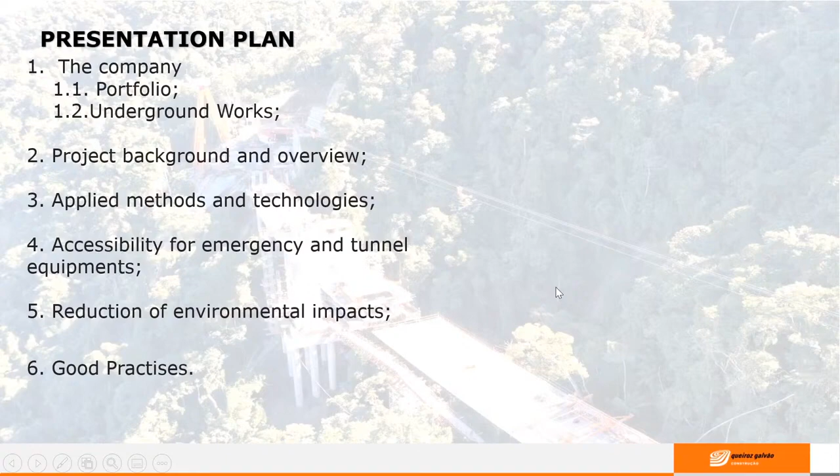So let's start the presentation. Here we have a short presentation plan with some topics that we are going to talk about in sequence: quickly about the company, the project background and overview, applied methods and technologies, accessibility and emergency and tunnel equipment, the reduction of environmental impacts, and the good practices of this contract.

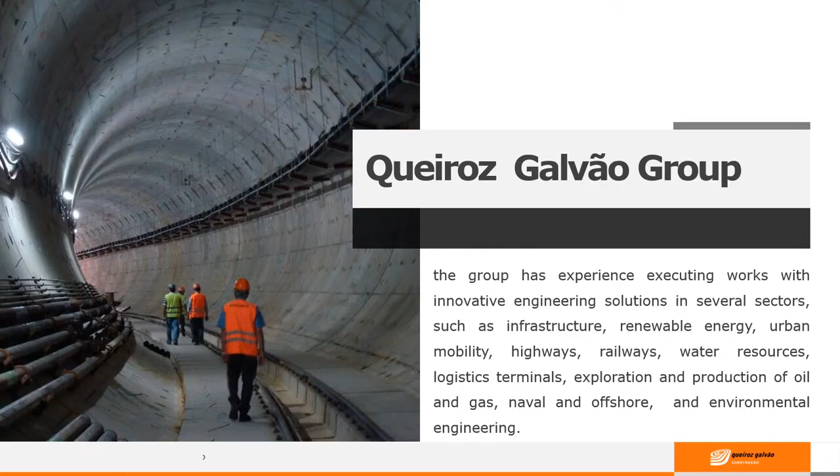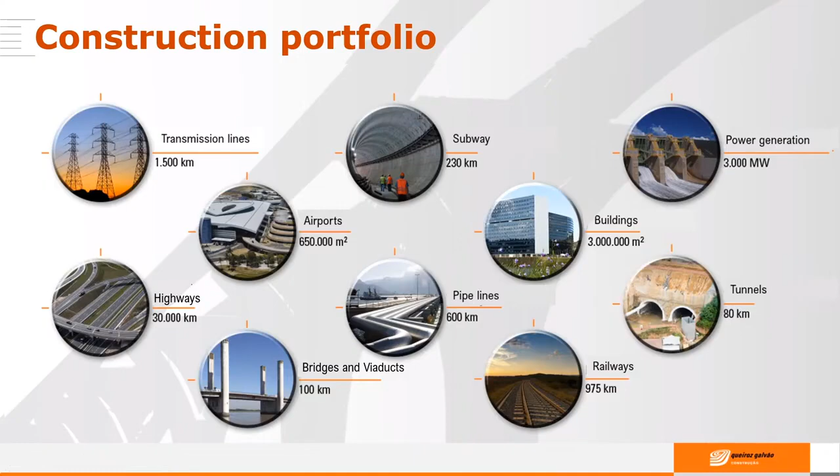So here we have a resume of the group Queiroz Galvão. With more than 67 years of history, the company operates in national and international markets and has experience executing work with innovative engineering solutions in several sectors, such as infrastructure, highways, airports, bridges, pipelines, buildings, railways, subways, power tunnels, power generation, and underground works. In this segment, we have more than 300 kilometers executed.

So, as we're talking about tunnel works, I'm going to show quickly other important projects of the company. This work in Brazil was the Metrofor, in the northeast of Brazil, as you can see on the map. It was a work with the cut and cover method with diaphragm wall.

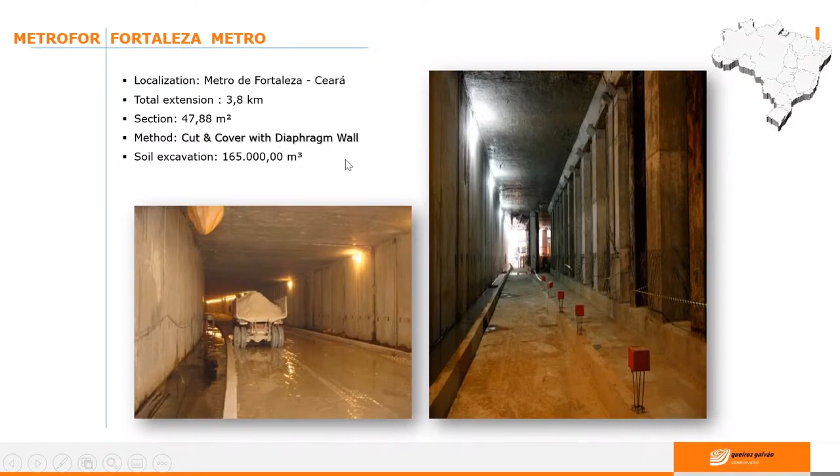Here we have line 5, the metro of São Paulo. The method used was NATM and TBM. In this case, NATM was used to do the shafts and TBM for the tunnels.

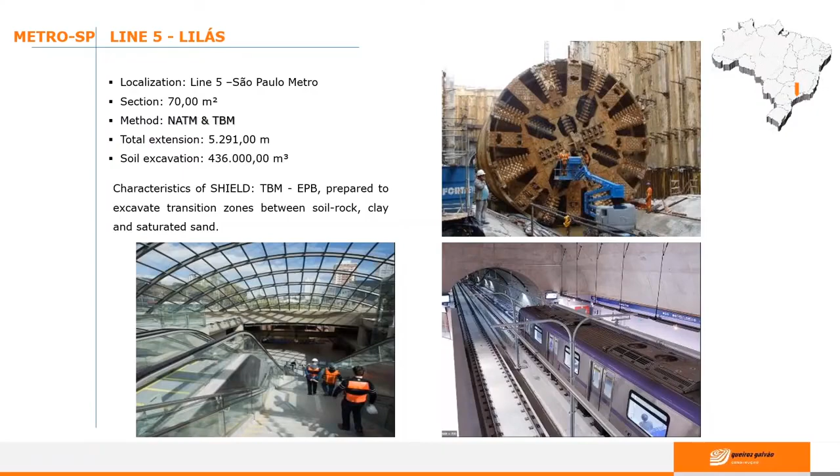Here we have line 4, the yellow line, São Paulo Metro. The method used was NATM and TBM. In this case we have 4.6 kilometers of NATM tunnels and 6.3 kilometers of TBM tunnels.

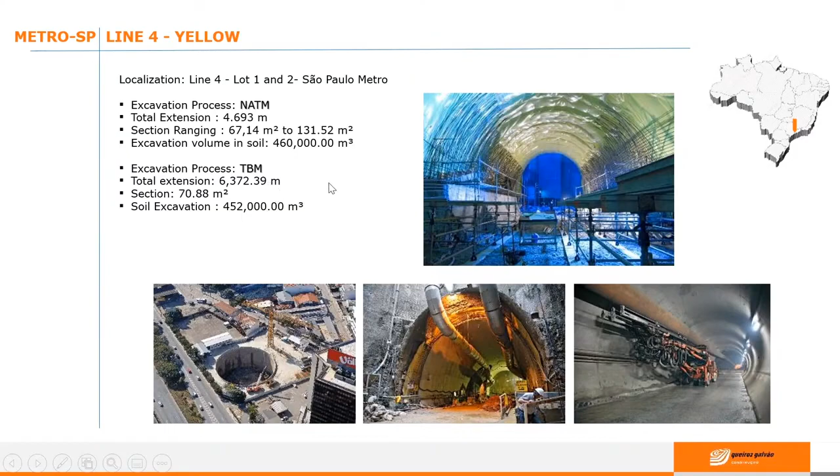Now here we have line 4, but in this case in Rio de Janeiro. This tunnel used both NATM and TBM as well, with a section over 100 square meters.

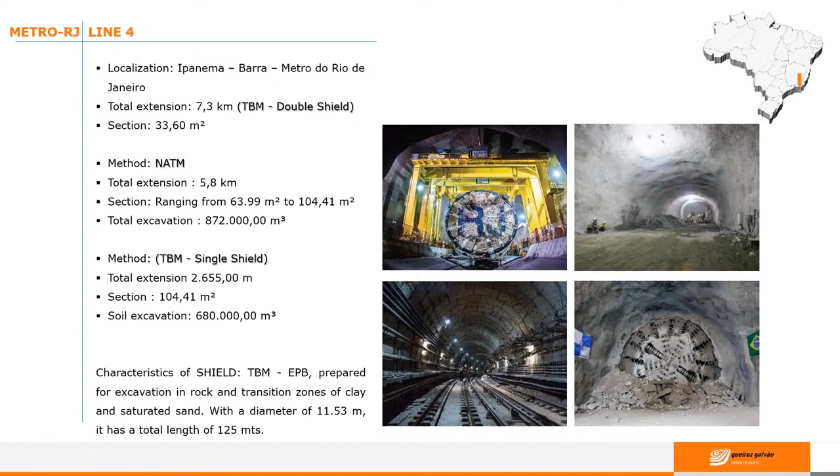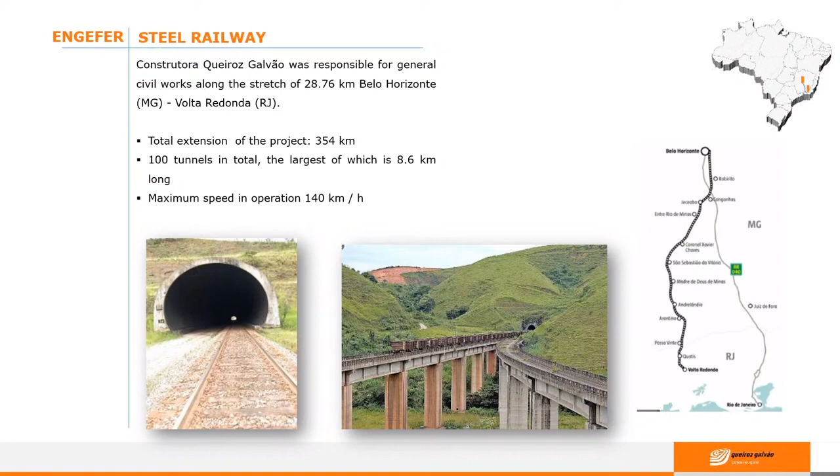Here we have the railroad tunnels. This one was made to create a connection between the countryside of Minas Gerais, a region rich in iron ore, and a region in the state of Rio de Janeiro, a steel industry region. Queiroz Galvão construction was hired to build a lot with almost 28 kilometers. In total, this project had 350 kilometers of extension and almost 100 tunnels in total, the biggest one with 8.6 kilometers.

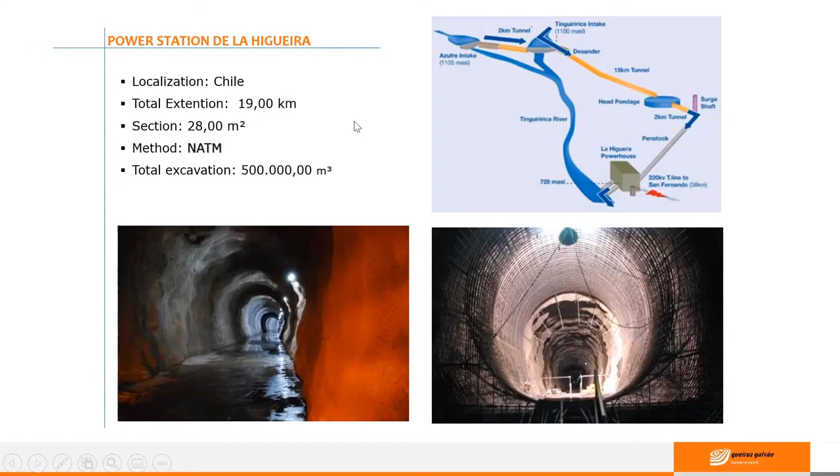Some hydraulic tunnels - here we have a work in Chile. It was a power station in La Higueira, in the city of La Higueira. In total, we have 19 kilometers of NATM tunnels.

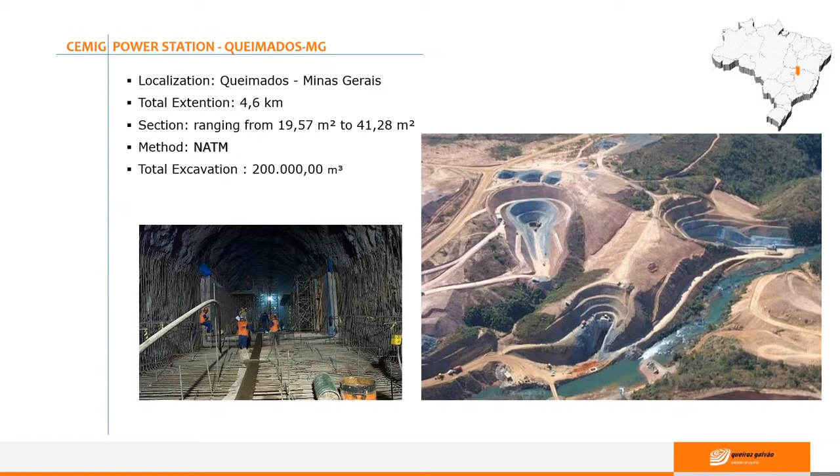Another one, another power station, Queimados, now in Brazil, in the southeast region. We had a total extension of 4.6 kilometers, and the method used was NATM.

Here we have the highway tunnels, an important highway here in Brazil, the BR 101. It was in the south region, as you can see on the map. We used NATM, in soil and rock, and the section was 125 square meters. The total extension was 3.7 kilometers.

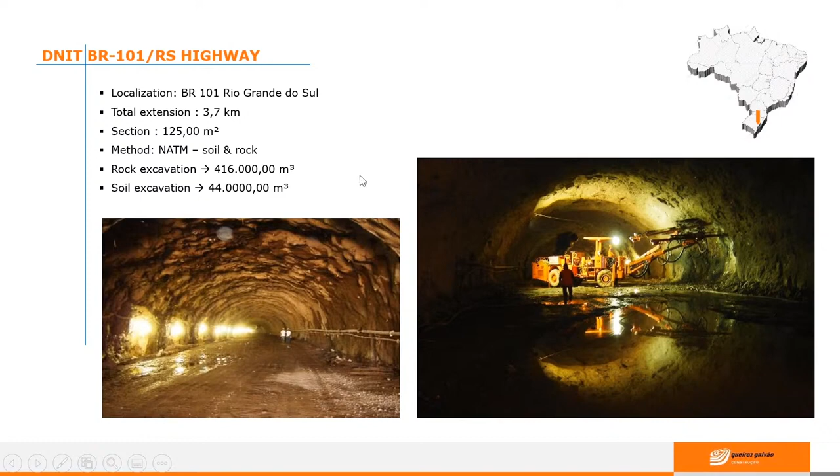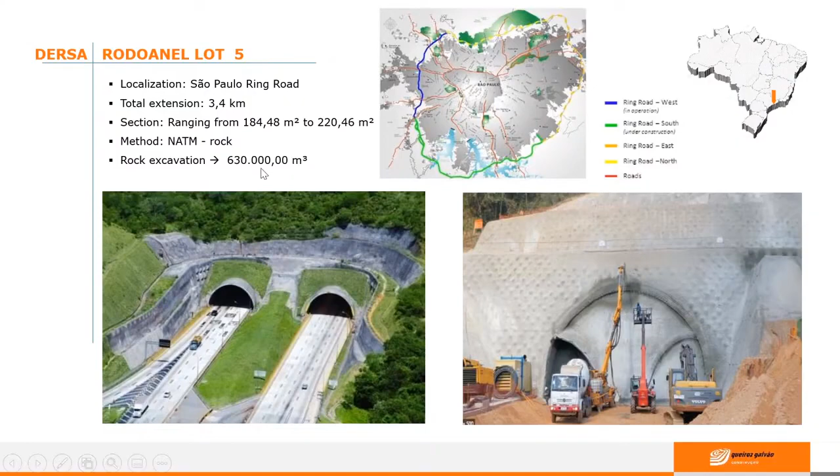We have here the Rodoanel Lot 5. It was a ring road around São Paulo. The total extension was 3.4 kilometers. The method used was NATM for rock excavation, with 630,000 cubic meters of material. Here we have another work in progress.

This one is in Salvador, Bahia, a state of the Northeast region. It is a connection between the littoral, the Atlantic coast, to the center of the capital, Salvador. This work has 3 tunnels and almost 12 kilometers, with 3 lanes each direction.

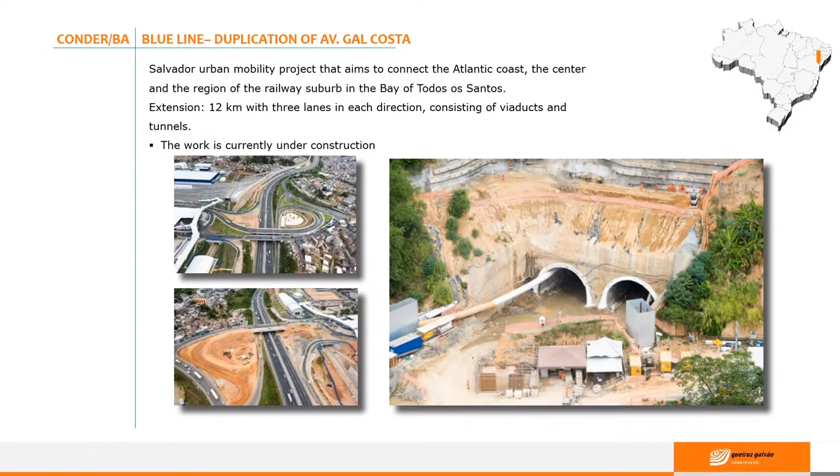Here we have to create a connection with the Tamoios highway and the port. I will explain better later, but this project specifically is going to connect the Tamoios highway when in operation, as illustrated in the next slides I will show.

This work that we finished recently, I had the privilege to participate in from the beginning. It was more than 12 kilometers of tunnels with a section of 105 square meters, and we used the NATM method. It was a double tunnel with a section around 105 square meters.

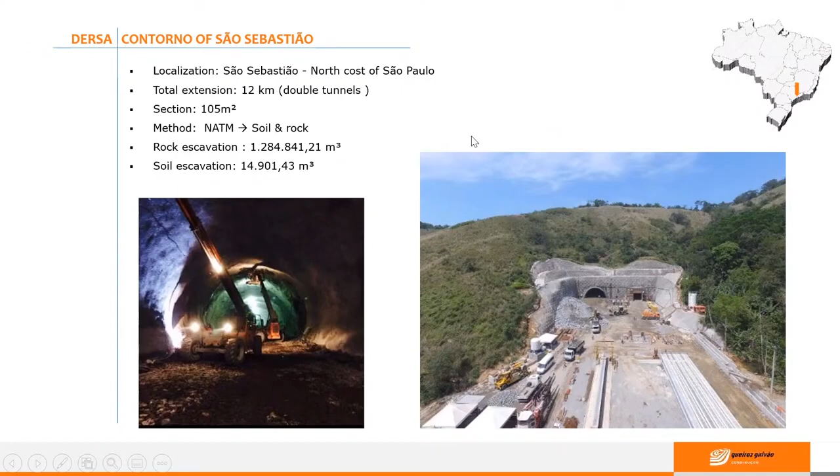So now we've got to the point. Let's discuss the Tamoios Highway. Here's some key information for the project. This work is located on the north coast of São Paulo, in the city of Caraguatatuba. We have almost 13 kilometers of tunnels and 10 viaducts or bridges. The method chosen was NATM. And so let's start.

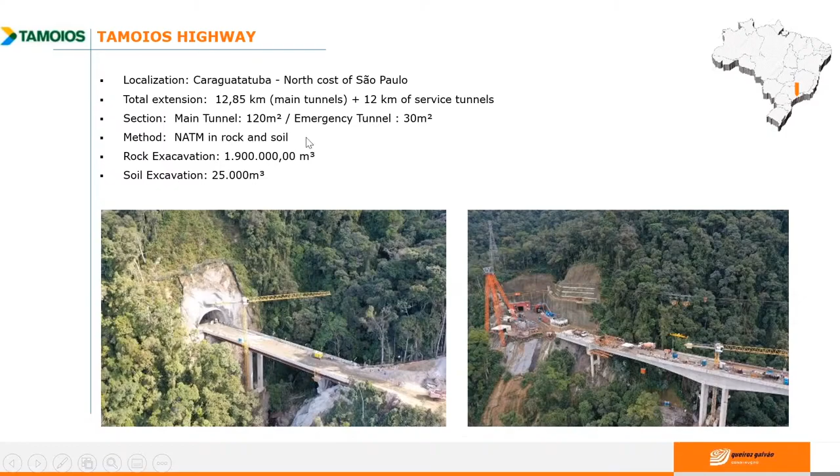The Tamoios Highway crosses the Serra do Mar State Park. The duplication of Tamoios Highway will provide more safety for users, with smoother ramps, less sinuous roads, and more open curves. In addition, it will improve the flow capacity of products to the port of São Sebastião, moving the economy. Due to the differentiated technology solution to reduce impacts on the Atlantic rainforest, the project received in 2017 the Eco Sustainability Award from the American Chamber of Commerce, an international entity.

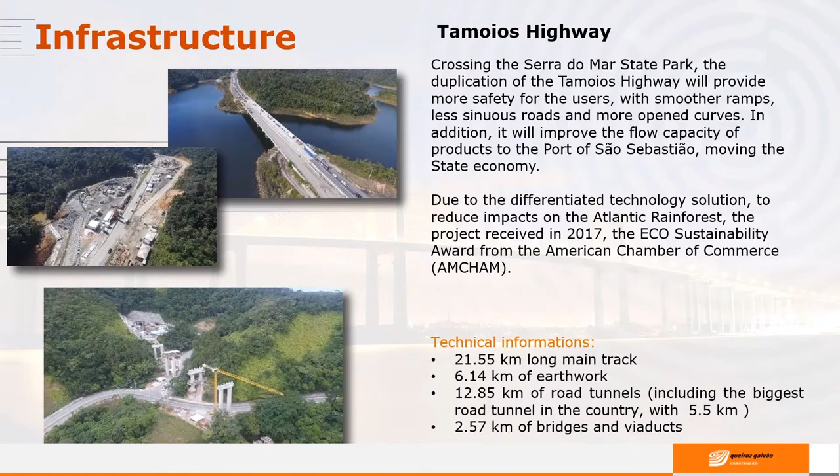It's important to say that almost 85% of this work is inside this park, the Parque Serra do Mar. It is located in an environmentally protected area with several species of animals and plants. So more than 80% of this work is inside a protected area.

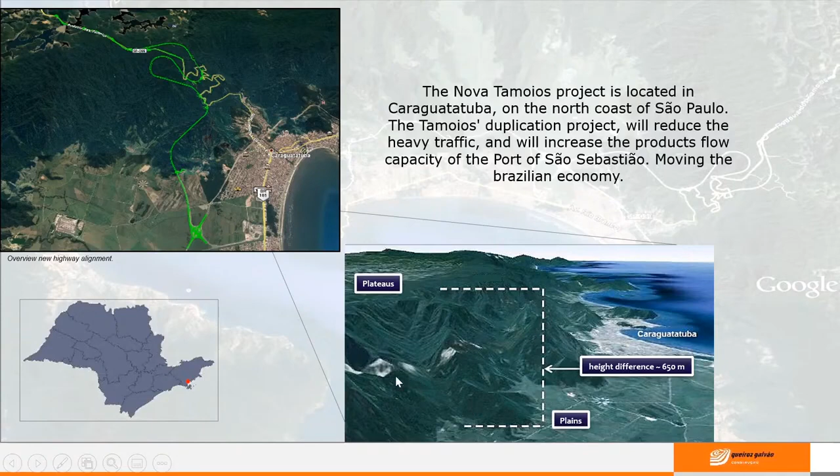Those were the big challenges here: to bring the highway from the top of the mountain to sea level, and also to build the viaducts and tunnels inside a protected area. So I think if we summarize, those are the challenges.

This port, in particular, has better conditions of operation than the port of Santos, one of the main Brazilian ports - it's a secondary port for the state. With this, we have an important project for the economy of the state and the economy of this country.

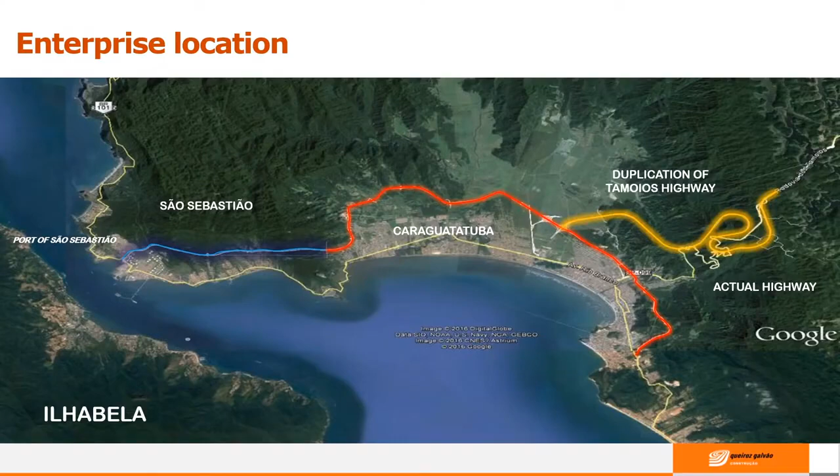Okay, so we have here the layout of the work, the Tamoios duplication. Here we have the actual road to access the north littoral, and here the old one, as we name it. This project includes the construction of 10 viaducts, as you can see here in yellow, and 4 tunnels. In total, we have a stretch of 21 kilometers of extension.

We have 4 tunnels. Tunnel 1 with 2.9 kilometers. Tunnel 2 with less than 1 kilometer. Tunnel 3-4, 5.5 kilometers, the big one, and tunnel 5 with 3.7 kilometers of extension. So we have here viaduct 6 with almost 1 kilometer of extension.

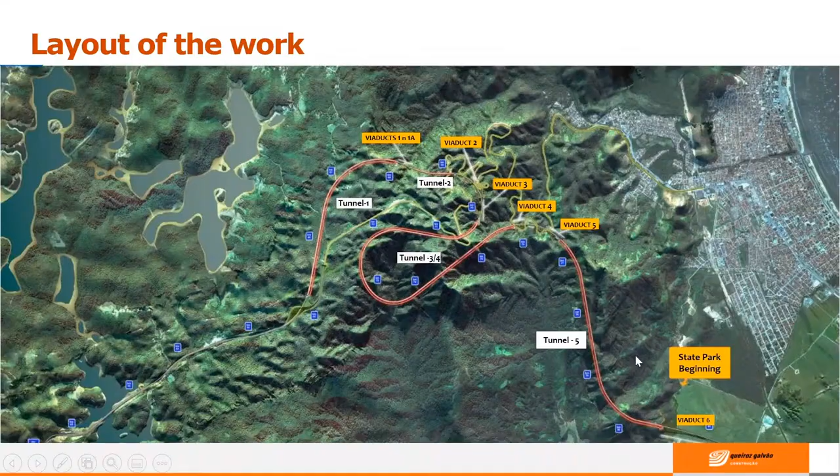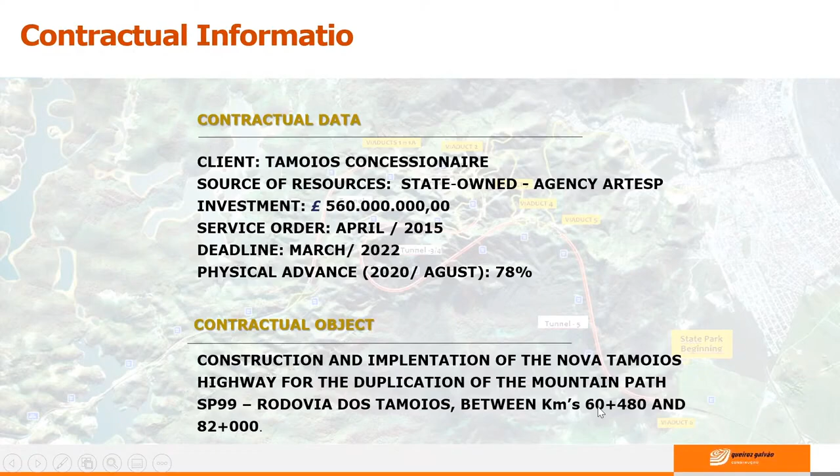So we have here a board with contractual data. The client is the concessionaire Tamoios. The source of resource is the state. We have an investment close to 600 million pounds. So it is a big work. The service order was April 2015, and the deadline is March 2022. Today we have a physical advance of around 78%. The object of this contract is the implementation of the Nova Tamoios Highway and the duplication between the kilometers 60 and 82.

So we have here this board. This table presents the main quantities of this project. So we have here a resume: 4 tunnels, 10 bridges, earthworks bridge, the largest bridge with 948 meters, in the total extension of this project.

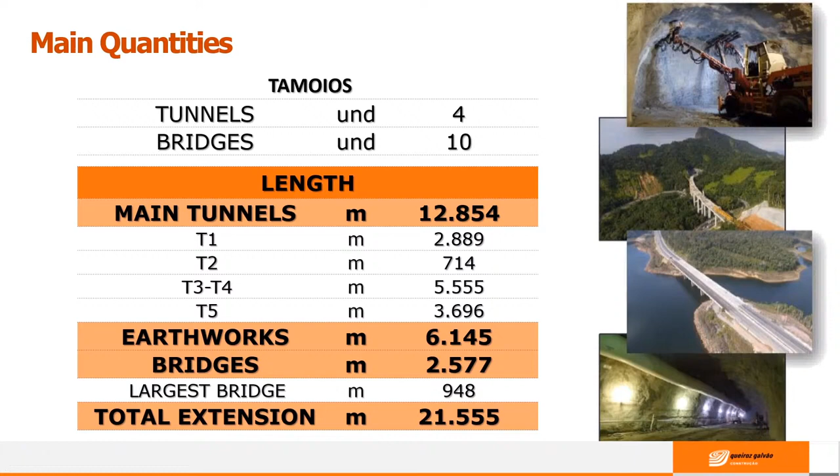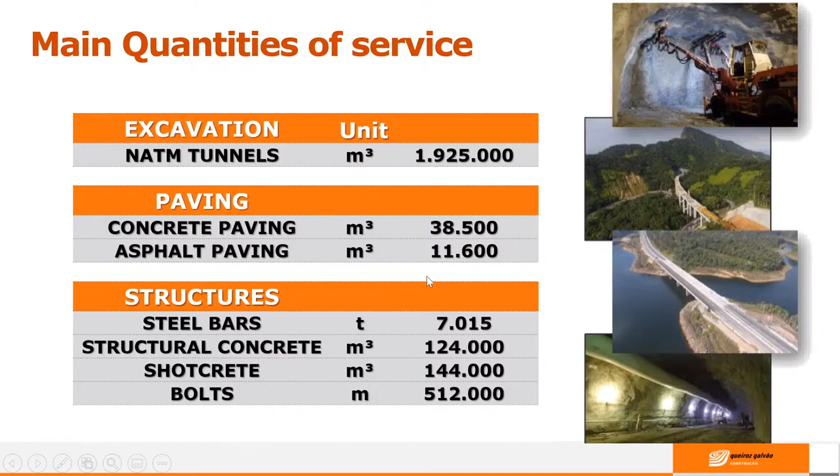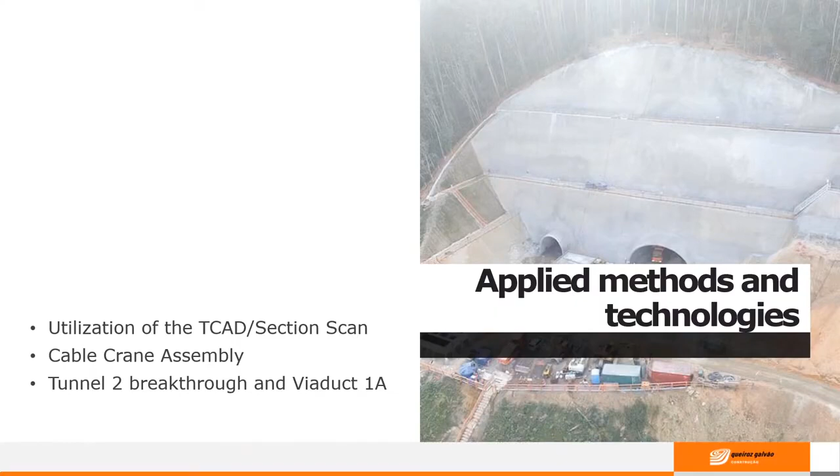So we have here a sum up, we summarize some topics, and we are going to talk about the sequence. We have the utilization of TCAD software, the section scan, the cable crane assembly, the tunnel 2 breakthrough, and the viaduct 1A. So we have here the applied methods and the technologies of this giant work.

Just to explain, the NATM is a commonly used excavation method using the drill and blast technique, consisting of rock drilling and detonation of explosives in the tunneling fronts in rock masses. So we have some stages of the cycle.

Sure, it's a pretty common method. First, we have the geological mapping with the topographic team. Then the front drilling with the boomer. After this, we have the explosive loading. Then the detonation, and after that the ventilation system for gas removal. Then we have both mechanical and manual scaling. And finally, the shotcrete, the sprayed concrete. The cycle repeats over and over until the tunnel is done.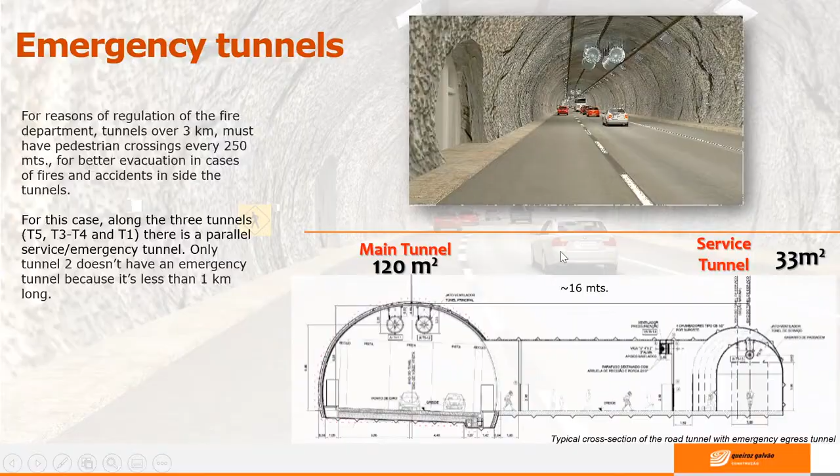As we said before, every 250 meters we have to have a connection tunnel. But in this case of tunnel 3-4, as we are talking about a tunnel with 5.5 kilometers, the fire department regulation demands a massive extraction or ventilation tunnel. This ventilation tunnel will be equipped with 6 fan jets with 150 horsepower each, which will be activated in special cases such as fire or high gas concentrations.

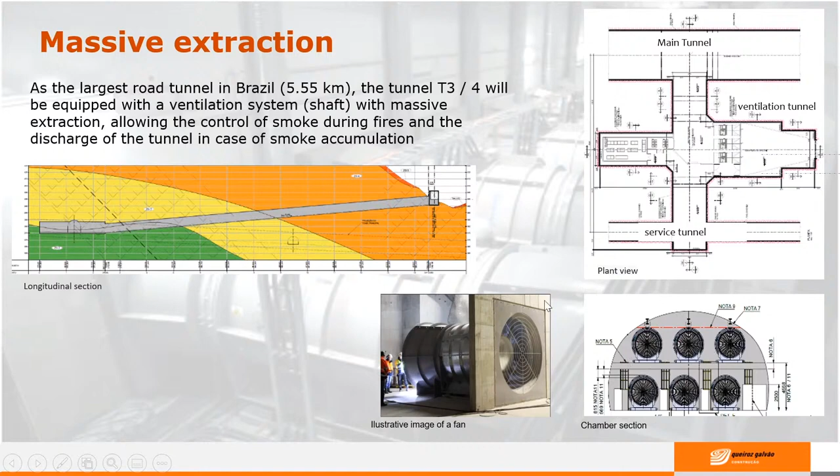So we have here the service tunnel and the main tunnel, and between them there is a chamber with the power plant, and we can see here the six fan jets for the massive extraction. So we have here a plant view, and we can see in this region many types of excavation sections in the same area: the main section, the service section, the connection, and the shaft section. We can see here through the chamber the operation, a controller room, and a power plant of this tunnel when in operation.

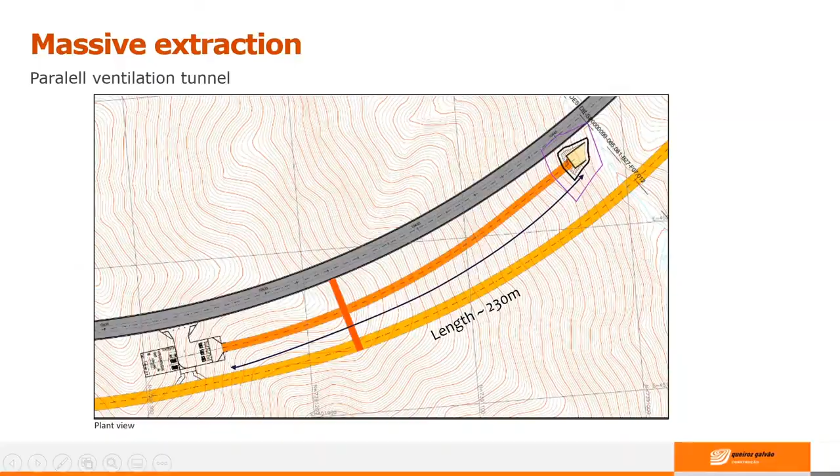So here we will talk about the jumbo system. It's not innovation, but as we're talking about work with 80% of tunnels, it turns into a crucial tool to perform the tunnel cycle and the excavation control.

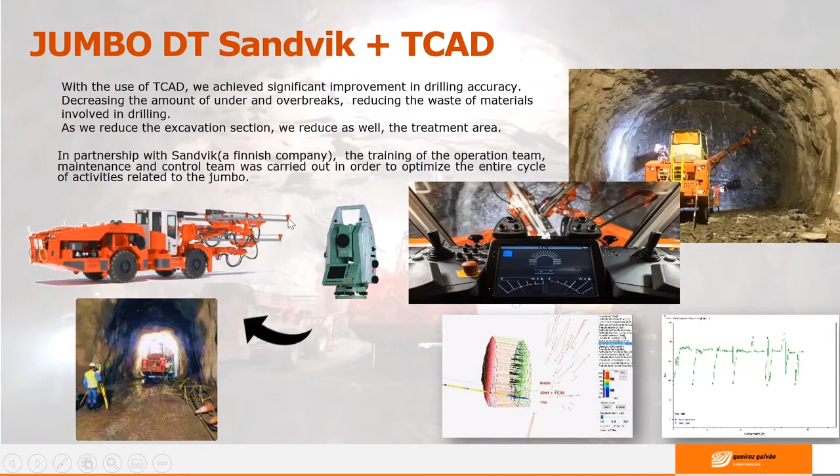We bought in the beginning of this work 6 equipment like this. This model in specific has 3 booms and the TCAD system. We have some examples here of the reports.

We can export some information like drilling speed, the water pressure, hole depth, and other important data for the operator at real time.

So we have a significant improvement in the drilling accuracy, decreasing the amount of under and over break, reducing with this, of course, the waste of material involved in drilling.

And this is a partnership with Sandvik, a Finnish company, and all the operators were trained, and the maintenance equipment, to control and optimize the entire cycle of activities related to the jumbo.

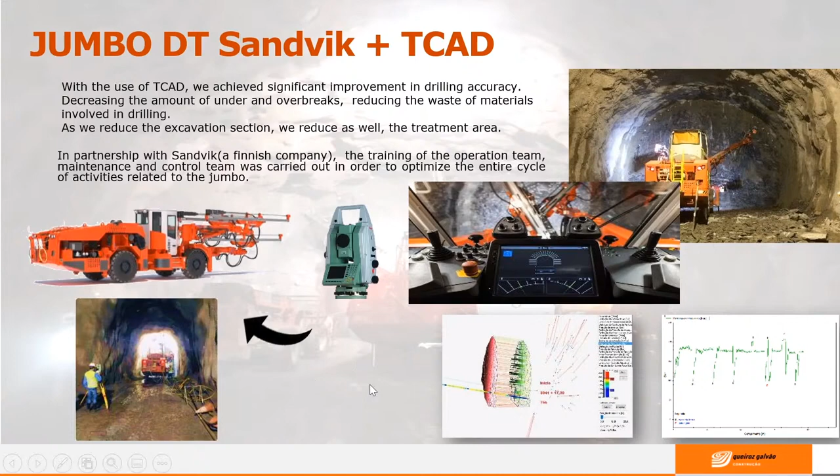Okay, so we have here the topographic equipment. We have here a total station. It is a robotized station, and this equipment is responsible for the geopositioning of the jumbo, and locates the drilling holes and maps the excavation section.

With the aid of the systems, an autonomous system, we are able to collect information and compare sections in real time. This technology guarantees the treatment of under break points and drilling adjustment for the next blasts, minimizing rework and loss from over excavation.

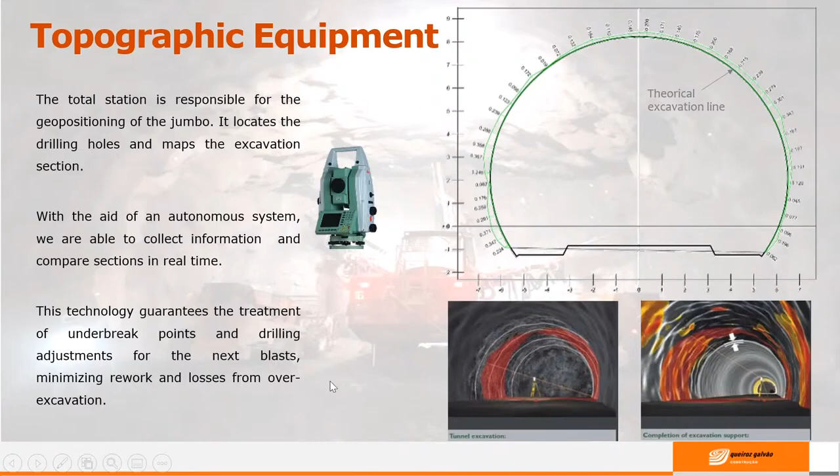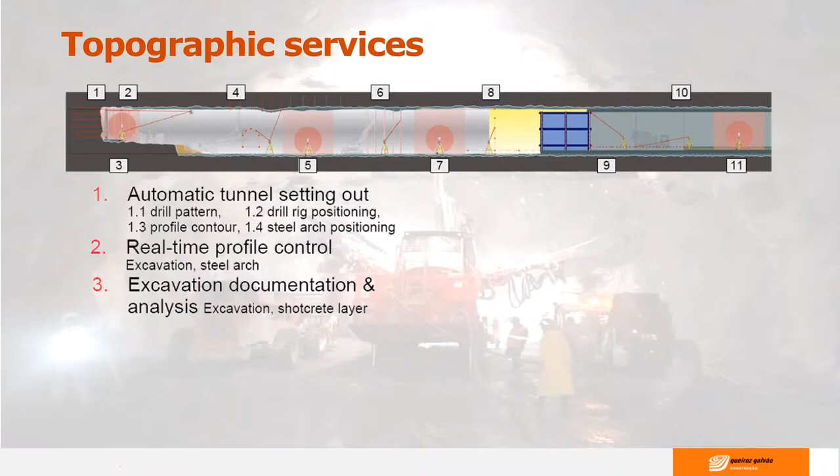These slides represent the important stage, the stage related to which the topographic team is responsible. It is one of the most important teams in underground works. Here are all the services the topographic team executes in a tunnel excavation. As you can note, they participate in all stages of the excavation cycle.

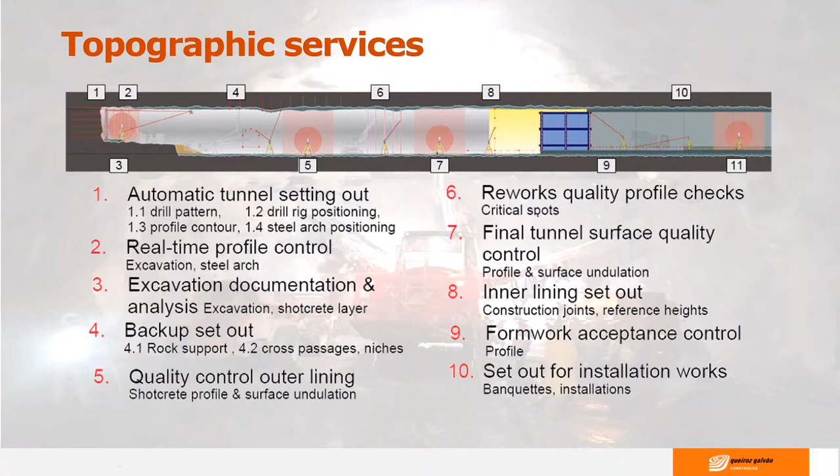So we can control the quality of lining. We can have the real-time profile. We can back up and set up the section and other services that we can control in real time, okay, in the shotcrete time, all the treatment, the excavation and others.

So here we have it. It's important to mention this work in Brazil today is the first one to use only polypropylene fibers to resist fires and structural loads. This can be achieved by applying in the shotcrete mix an addition of micro and macro fibers.

Okay, it's important to mention again, we are doing some pioneer things here in Brazil because we are doing the tunnel lining with 100% synthetic fibers, and this solution improves the shotcrete and the cycle of excavation with other advantages.

Another interesting point is that with these results obtained in this work, we are preparing together with other technical institutes the Brazilian standard for concrete reinforced with polymeric fibers. This is an innovation of this work.

Changing the steel mesh for these fibers, we are achieving greater work in a safer way, a quicker and cheaper way, as a result of this change.

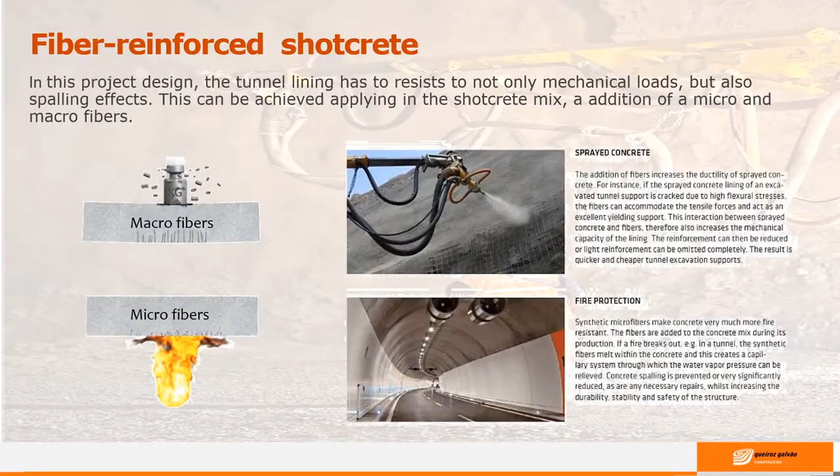So this is not an innovation system, but we chose this solution because of several factors of this work, and there are some points that we can talk about here.

The system allows the adherence between the first shotcrete lining and the second one, preserving the friction between both layers, allowing a significant reduction in its final thickness, providing with this, of course, a financial and time economy in the cycle of excavation too.

It has a lot of advantages over the waterproof membrane system, a usual system. It is not a systematic treatment, therefore not only cheaper but also easier to apply.

Dealing with infiltrations with high flow rates, as commonly found in tropical regions and rainforests, reduces groundwater pressure over the lining, avoiding overload due to extreme climatic events.

And when necessary, we can combine this system with short drains, as you can see here in the image, and a polymeric mortar in order to maximize its efficiency.

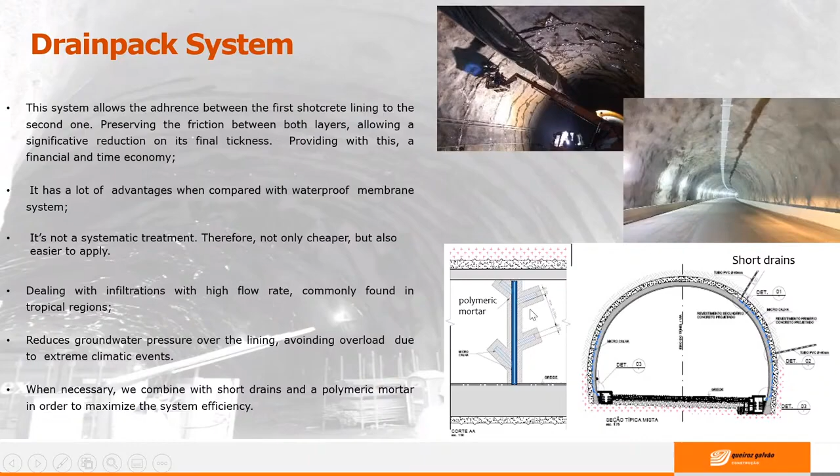So nowadays, the environment is a central subject in discussions about society in the last decades. When we were studying the project, our prime goal was to attend the environmental and contractual regulations, and good engineering practice. So let's talk about the most important innovation of this work, the cable crane.

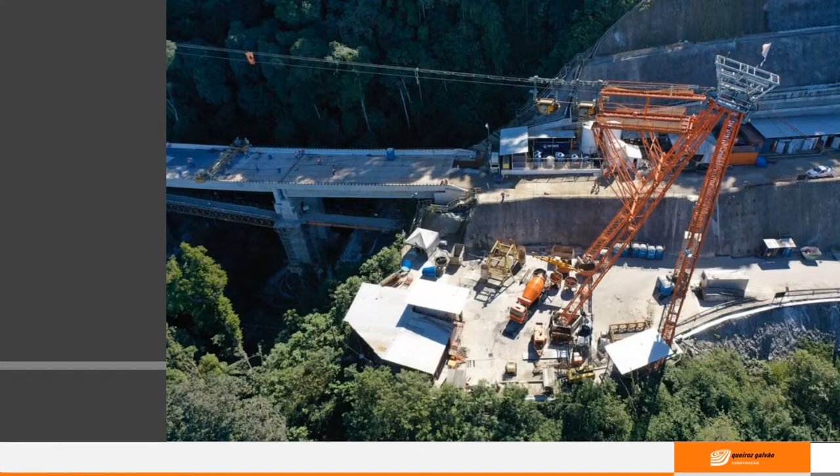From the beginning of this project, the company looked for different solutions around the world to avoid the execution of this service way, as you can see here in this orange line. That would suppress more than 40,000 square meters of rainforest, a big impact on the Atlantic forest.

Because of our short deadline, we had to start the viaduct and the tunnel at the same time. That's why we had to employ this pioneer technology in Brazil. It's the first cable crane assembly here in Brazil, so it was a hard mission to do this for the first time.

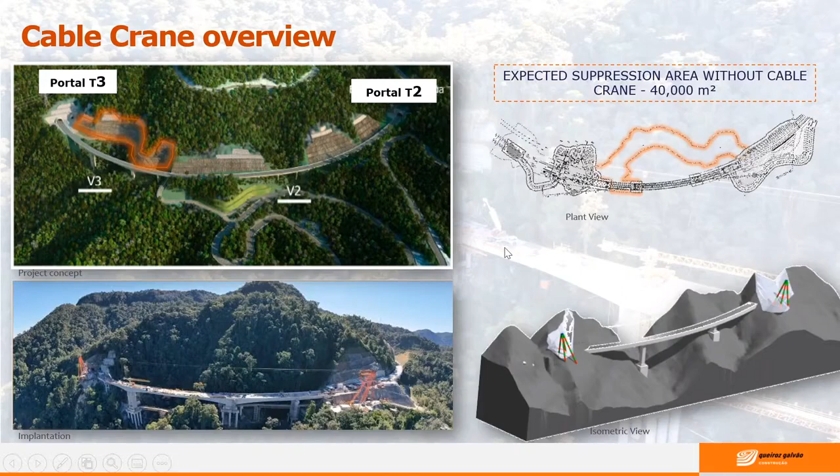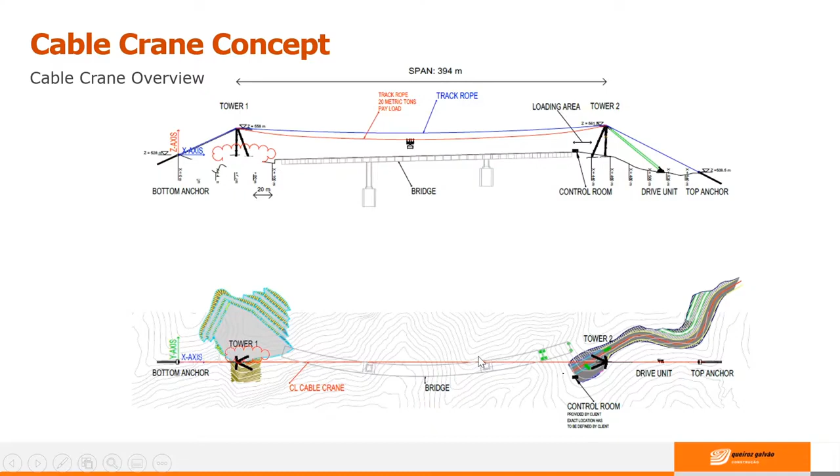As you can see in this overview, we designed the position of the track rope, the red line here, aligned with the main supports of this bridge to aid the execution of foundations, columns, and other structures of this viaduct. The track rope is placed here because of the viaduct's main supports, and also to help transport the rocks from the tunnels to their final destination.

Let's talk about the cable crane mounting details. In the case of Tower 2, we could assemble with a regular crane because we had enough space to do the operation. As you can see here, we have all this space and we can do a regular or standard operation. However, for Tower 1, that was not possible.

This region here was unreachable, as you can see with the helicopter and all this earthwork. That's why we decided to install each piece using a helicopter. As you can see in the video, this is Tower 1, in a remote region inside the park.

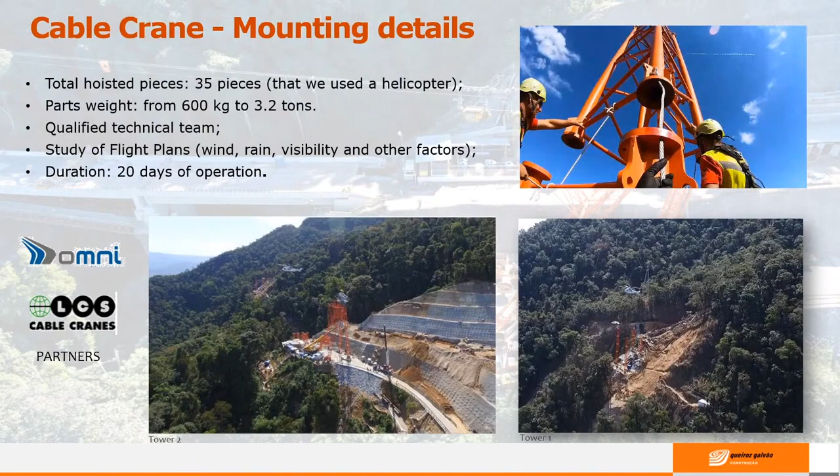It was so hard to get the liberation of the park to do this operation, but we can prove that there wasn't impact with this operation. We had a partnership with Omni, responsible for the helicopter, and another partnership with LCS, the cable crane construction company. But all the project was made together with LCS, Omni, and Queiroz Galvão.

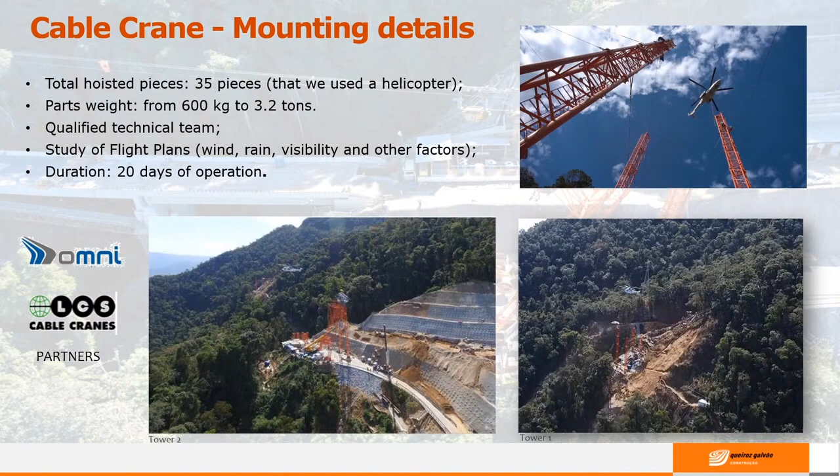So all this operation was made together. We have here some technical information about the cable crane. The distance between Tower 1 and Tower 2 is 394 meters. The track rope diameter is 65 millimeters. The load capacity is about 20 tons. The travel speed is 4 meters per second. And the tower height: Tower 1 is 42 meters and Tower 2 is 35 meters.

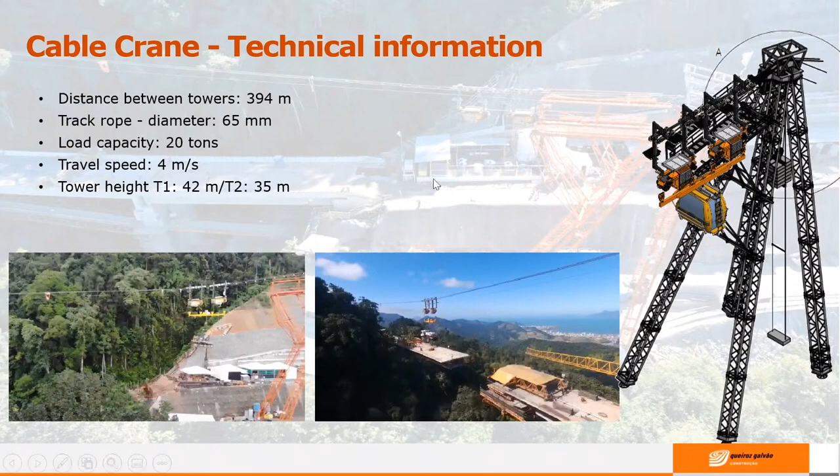As you can see in the videos, we can carry any type of equipment. I was in charge of the night production shift here in Tamoios, and the cable crane was essential. Every steel bar, every concrete, every framework, every equipment in general was transported by the cable crane, so it helped and was essential.

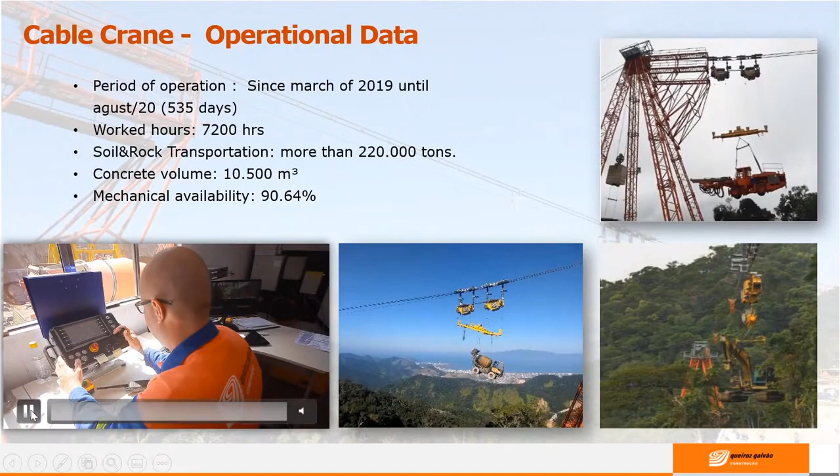We have here some operational data. The period of operation was from March 2019 until August 2020. We worked 7,200 hours. The soil and rock transportation was more than 220,000 tons. The concrete volume was more than 10,000 cubic meters, and the mechanical availability was approximately 90% utilization of this equipment.

So it was very efficient for this work and very important for the conclusion of this bridge. We can anticipate the deadline of this bridge by almost 2 months, and we can anticipate the tunnel completion by close to 5 months.

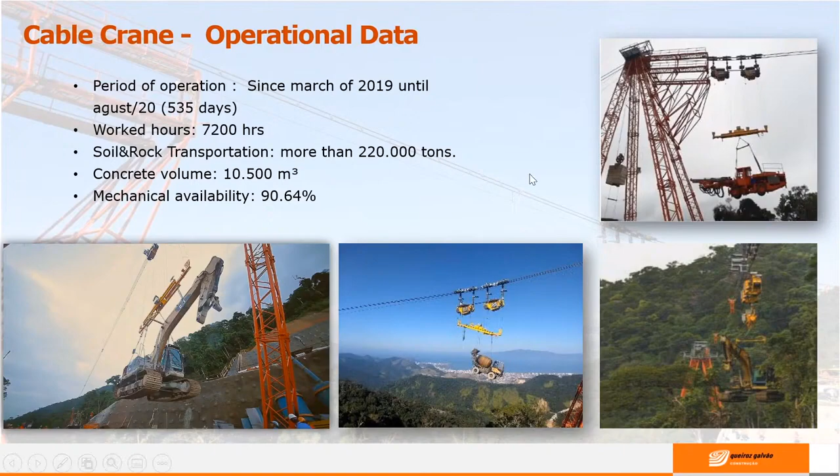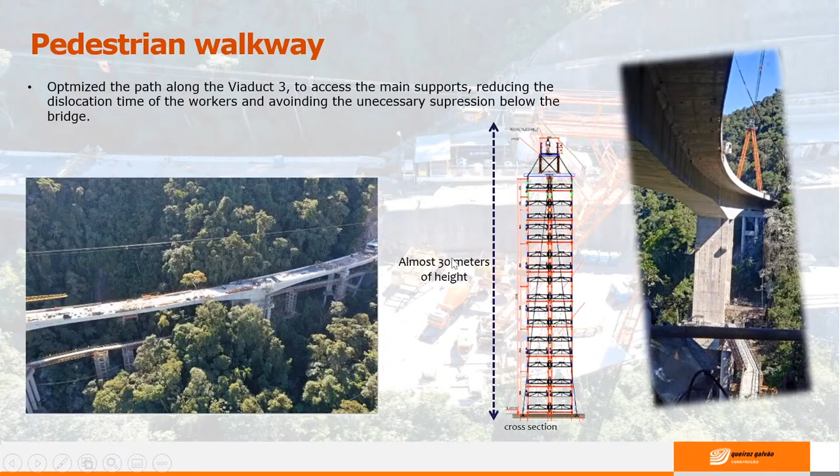We have here another solution, the pedestrian walkways, to optimize the path along the viaduct and access the main supports. With this, we can reduce the displacement time of the workers and avoid unnecessary suppression below the bridge. The tower height is almost 30 meters, and we can assemble this tower with the aid of the cable crane too. The cable crane supports all the operation in this assembly.

In the basic project, we expected to have an impact over 700,000 square meters. However, with all the engineering solutions, we had a positive impact, reducing suppression close to 40,000 square meters at the Atlantic forest, the equivalent of 6 football fields like Wembley Stadium. This reduction was very important for this work, and we were able to finish this bridge with the cable crane supporting this goal.

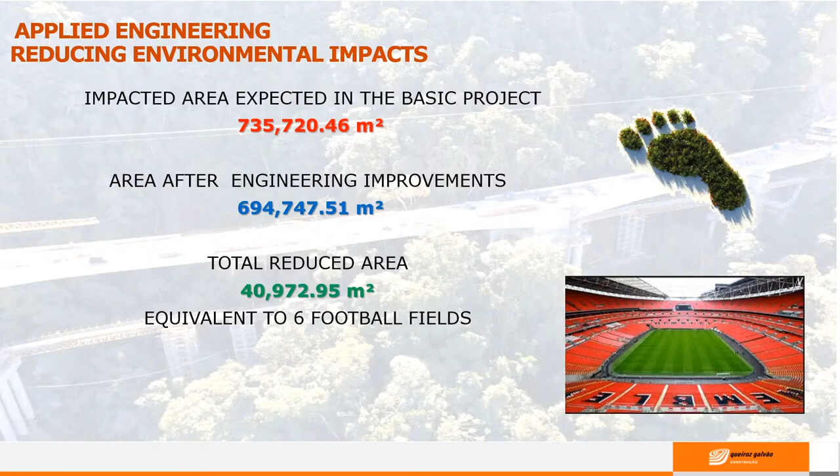Now let's talk about the water treatment stations.

Just to give an idea, during the drilling process of the tunnel, the boomer consumes about 40 cubic meters of water per cycle of excavation. So a work like this, with this proportion, we can consume close to 400 cubic meters per day.

So the system was developed in closed circuit. All the captured tunnel effluents, the infiltration water or post-drilling water, passes through the treatment station. Therefore, there is no risk of dirty water disposal, providing protection for the environment and reducing operational costs.

So each tunnel has a water treatment station to treat all the effluents. We can see in this graph the total volume in 2019, in cubic meters. We treated more than almost 300,000 cubic meters.

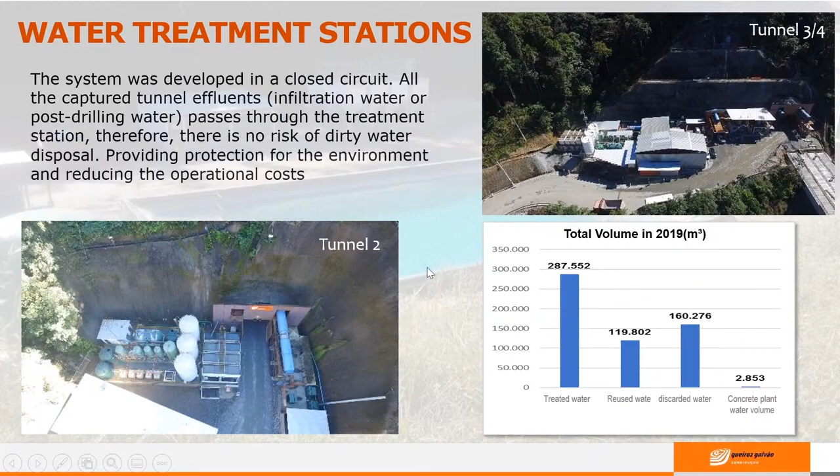The reused water was 120,000 cubic meters, and there's also discarded water and concrete plant water volume - other volumes of water, all of them treated.

We use more volume of treated water than our well water. So with this, we can avoid unnecessary natural water consumption.

Our primary reused water destination is the tunnel drilling, to attend to the demands of the jumbo, the equipment washing, the crushing plants, and the access routes for road watering.

So just to give an idea of how much we treat - in 2019 we treated the equivalent of 115 Olympic swimming pools. So we can see other images and the quality of this water.

We control all the parameters, like pH, sulfates, and other parameters of control of this water. And this water is potable.

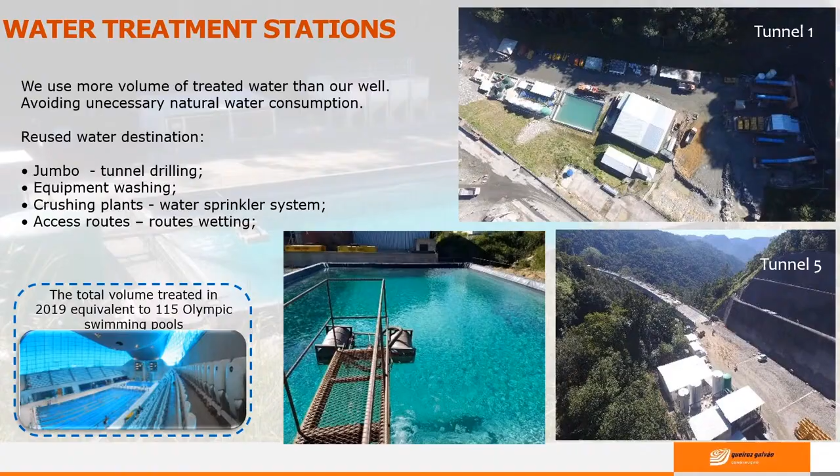Much of this excavated material will be used in concrete, in the asphalt plants, and the soil plants. The volume necessary for all civil works will demand more than 300,000 cubic meters of concrete.

Basically, we take the rocks from the tunnels, we drill, and then we have the crushing process, getting the gravel and the rock filler, and we use them in the shotcrete, in our sprayed concrete, in our concrete, and in our paving, reducing natural waste and costs.

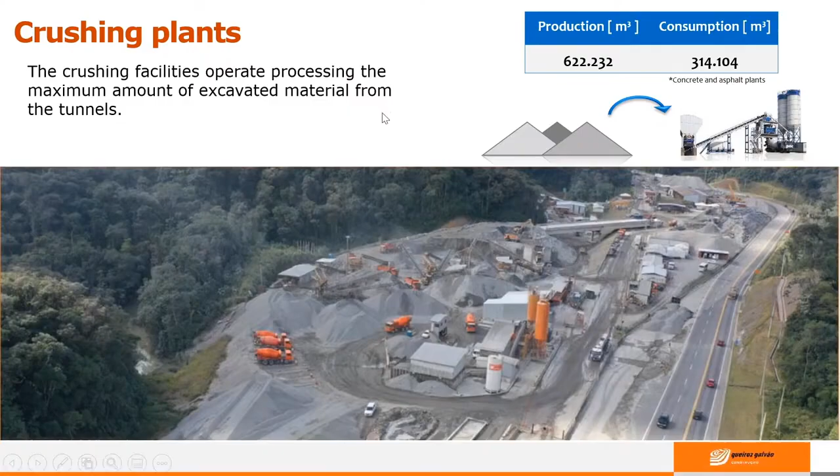But in this case of Tunnel 2, due to environmental limitations, we had to dig from just one side. With that, we had to break through the tunnel from the inside out.

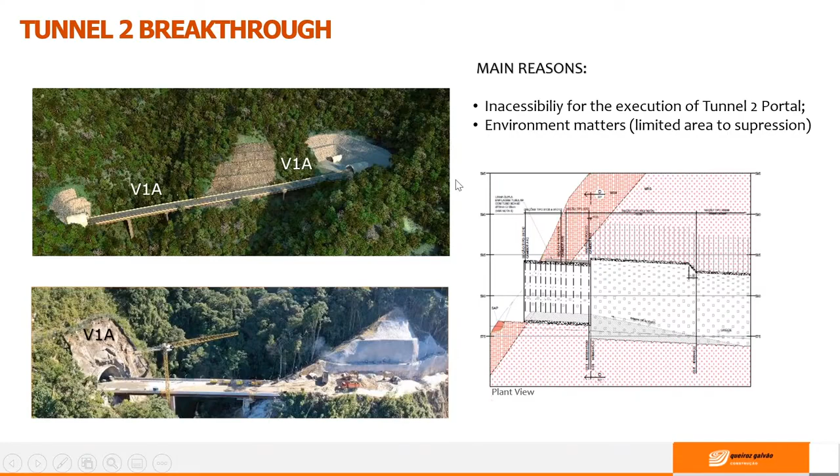To save time in the execution of the viaduct, we thought of a solution to assemble the viaduct inside the tunnel and then push it with hydraulic jacks over the supports. With this, we can save time and deliver this bridge to the client within the deadline, as demanded.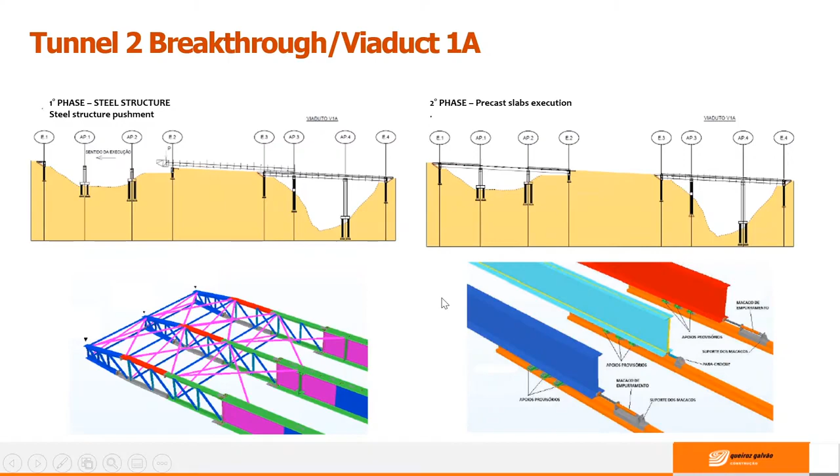That's the good practice of this contract. So we have here some items that summarize some of the key points.

Principal and service tunnels approximation - we reduced the interconnection tunnel length, decreasing the total area of treatment and suppression.

The shotcrete technology control, the use of rock filler, and the PP fiber - polypropylene fiber - in the shotcrete mix design. With this, we did not use natural sand in the mix, improving efficiency in the results and the quality parameters, and reducing the need for material deposits.

The cable crane assembly - a solution for reducing the environmental impact and making the executive schedule viable. The first time in Brazil, a pioneer.

The Tunnel 2 breakthrough/Viaduct 1A was a differentiated solution, saving time and protecting the environment.